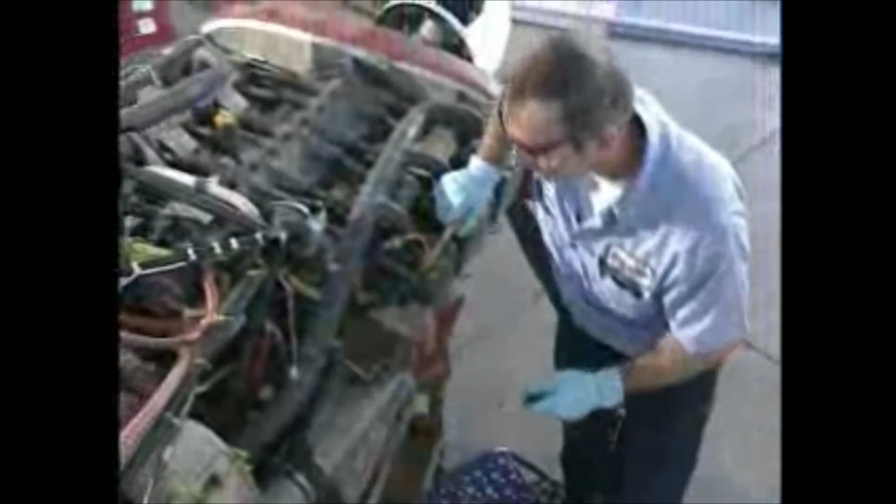Cargo flying is a good example of high-use punishment, and that's why recently we visited Ameriflight in Burbank, California, the maintenance and operations base for over 170 cargo aircraft. This fleet of hard-working Lycoming engines logs thousands of domestic air miles each year. So how does Ameriflight achieve the best performance possible from these engines?

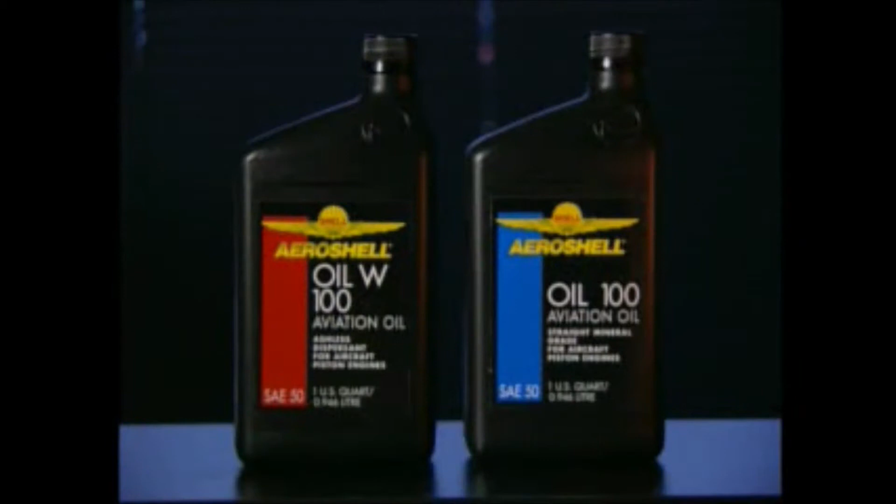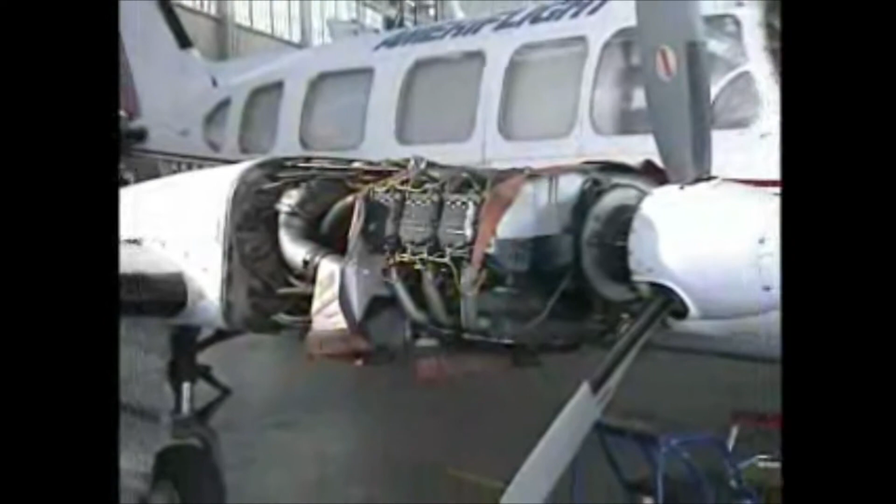And during this video presentation, the professionals will show you how to achieve that optimal performance, or full TBO, from your new or replacement aircraft engine. So let's meet the experts. Ben Visser has been with Shell for over 30 years, working on the research and development of fuel and lubricants. He's the man who can answer the important questions about aviation lubricants.

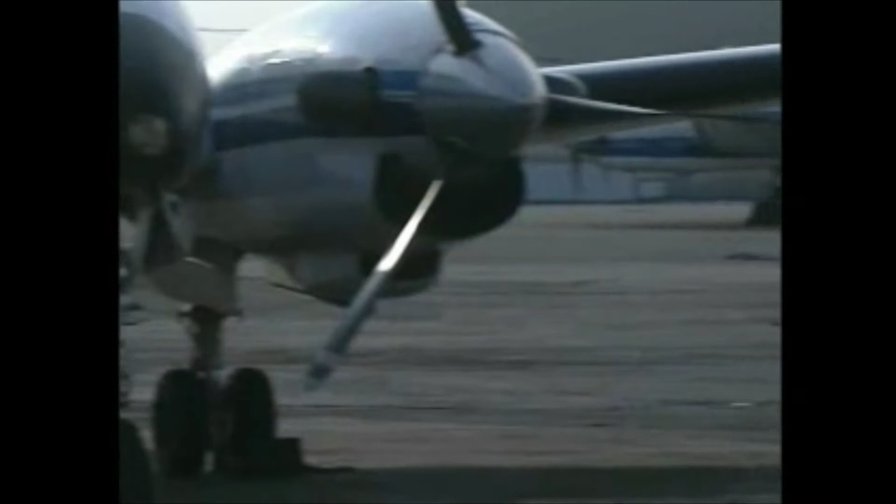Paul McBride, who began his career at Textron Lycoming in 1963, is a third-generation employee. His knowledge of piston-driven aircraft engines is the result of years of hands-on experience. John Hazlett is the Vice President of Maintenance and Director of Operations at Ameriflight Incorporated. John's team has been able to achieve 99.87% reliability of their aircraft by adhering to the methods that will be demonstrated to you during this presentation.

So, what are we hoping to learn from this video? Keep in mind that we'll cover three major areas of aircraft engine care: engine installation, startup and break-in, and maintenance and normal operating procedures. So, as a pilot and new engine owner, you should get familiar with the procedures that will keep that engine flying in peak condition. That is, what to look for during the installation of your new or rebuilt engine, how to handle the initial startup and break-in, as well as executing proper maintenance and normal operating procedures.

Let's focus on the installation. It would be so easy if we could just bolt the engine onto the airframe and place the aircraft back into service. But crucial elements need to be considered when installing a new or reconditioned engine. Instrumentation, baffles and seals, the oil cooler and air filter and their associated hoses are important parts of the overall system. Many high-use aircraft had their engines overhauled 2, 3, or more times, yet still retain the original gauges.

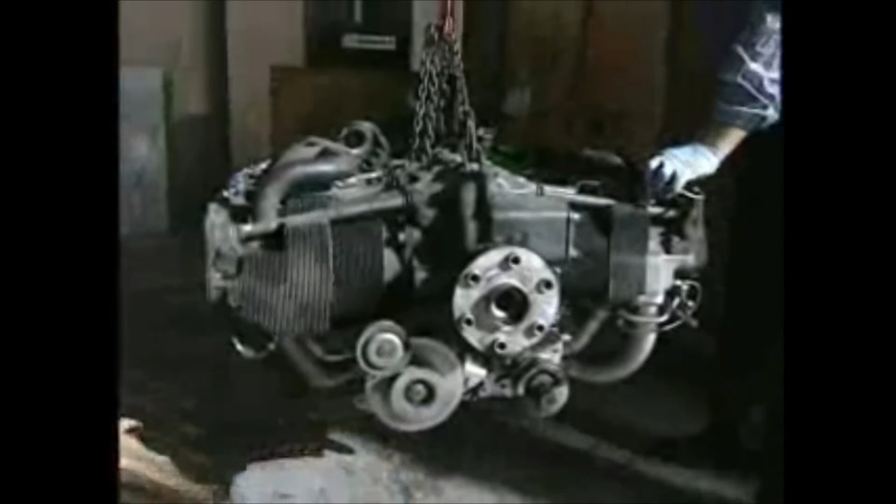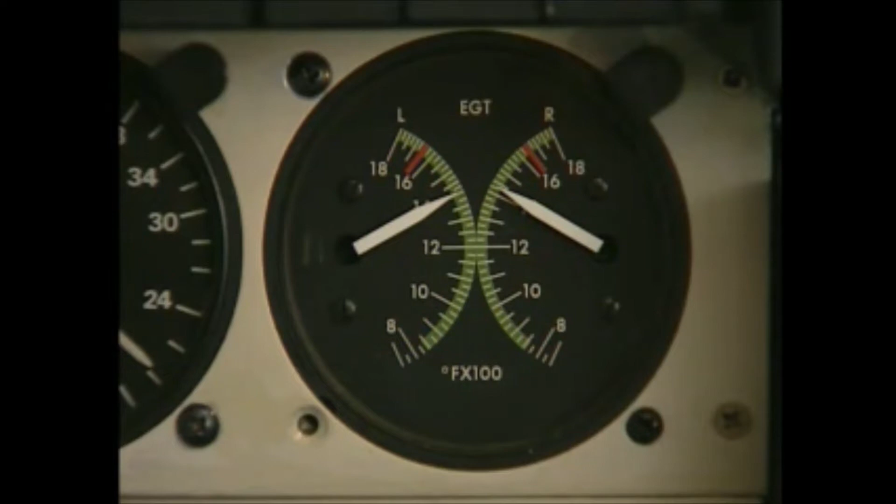For instance, a tachometer with a 5 to 10% error in calibration will greatly increase the load on the propeller and the engine bearings during operation. The cylinder head temperatures and exhaust gas temperatures are indicators of change in the engine. For high-performance engines, these indicators are critical when setting the mixture or monitoring the condition of the engine. So the tachometer, EGT, oil temp, and CHT gauges should be calibrated at this point and not overlooked. Be sure to use the most recent printing of the appropriate service bulletin.

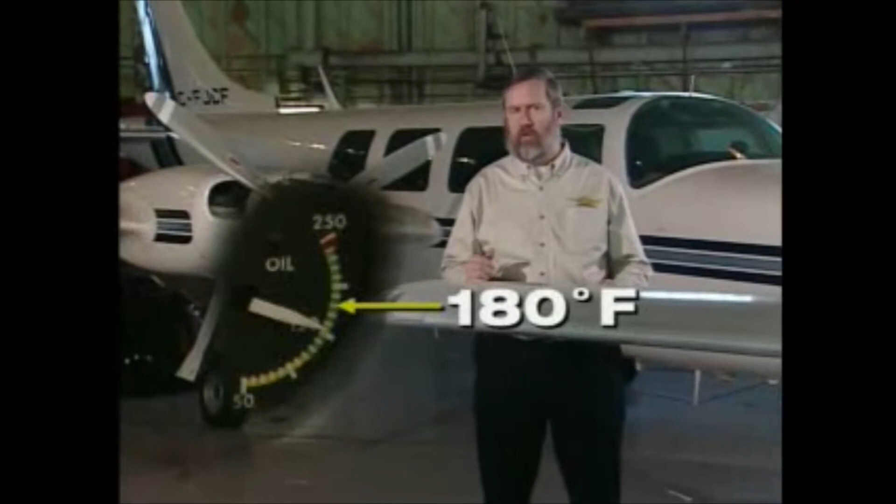But what about oil temperature during operation? Is it too hot? Not hot enough? Ben Visser has the answer. I bet you didn't know that a thermometer and a permanent marker can help you maintain an aircraft engine. But they can, and here's how it works. You need to make a reference mark at 180 degrees Fahrenheit on the face of your oil temperature gauge. This is a good target temperature for your engine oil.

You should be aware that the typical green band on an oil gauge starts as low as 120 degrees and goes all the way up to 245 degrees. That's a pretty wide range. On most Lycoming engines, a cruising oil temperature significantly below 180 degrees won't boil off moisture present in the oil. This is especially true during a short flight.

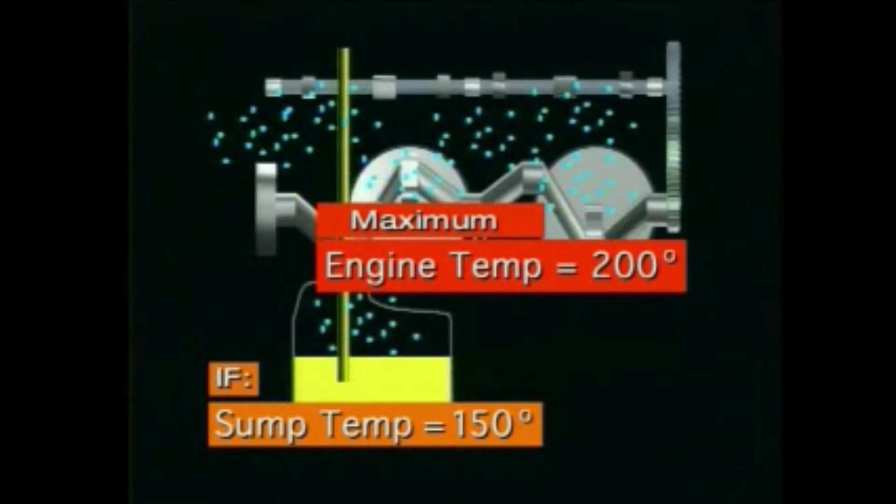At the hottest point in a naturally aspirated engine, the temperature is about 50 degrees higher than the oil in the sump. So, if your oil temperature reading is only 150 degrees, the hottest oil in your engine is just 200 degrees. Well below the 212 degrees needed to boil off the water in the system formed from condensation. The result is water and acid buildup in the crankcase, which could lead to rust and corrosion.

Moreover, if your aircraft is based in a humid climate and only flown occasionally, the chance of corrosion increases. We do not recommend that you ground run an inactive aircraft. A short ground run is insufficient to get the oil temperature to 180 degrees. Now, on a turbocharged engine, the highest oil temperature is usually 70 to 75 degrees higher than the sump.

In this case, we want to keep the oil temperature down to around 180 degrees. This will help reduce engine wear and deposit buildup. That's where the thermometer and marker come in.

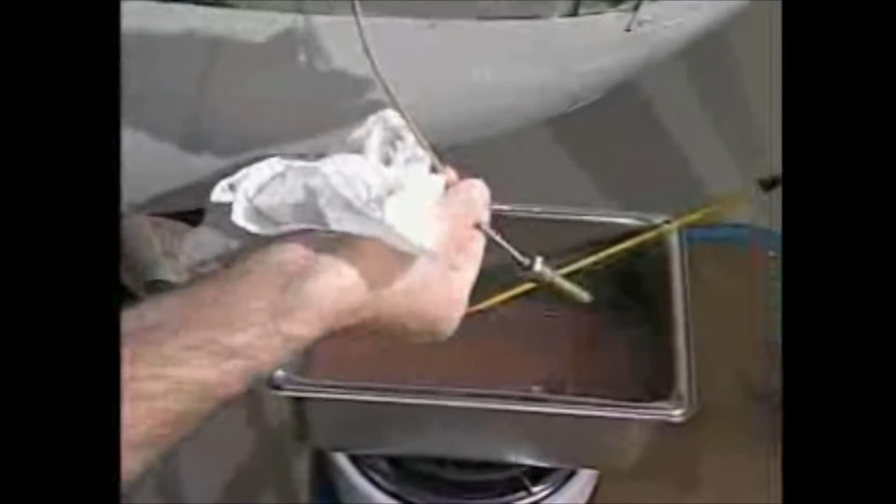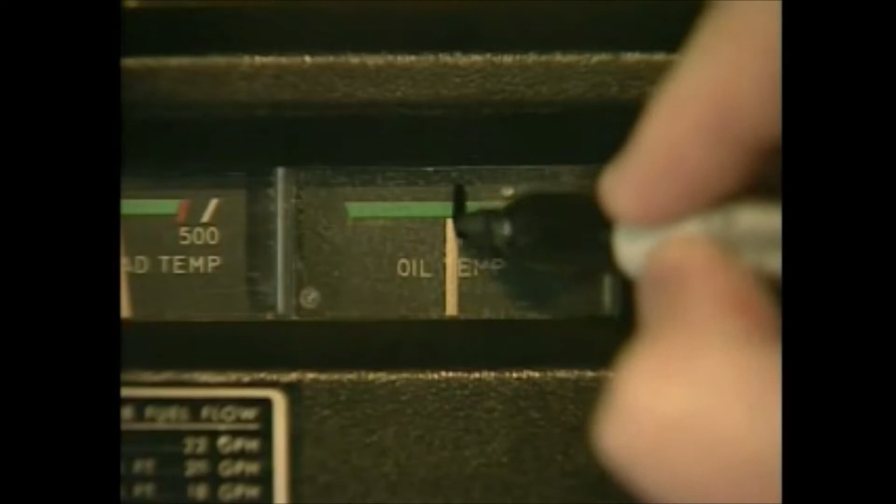Take your oil temperature sending unit and a reference thermometer and place them in a steel container filled with oil. With a hot plate, heat the oil to 180 degrees and mark your gauge. Even if your gauge has temperatures printed on the face, checking the accuracy is worth your time. So, make that mark at 180 degrees and extend the life of your engine.

We'll learn more about checking oil, oil pressure, and oil coolers later. But baffles and seals are the next item on our checklist. Let's see what Ben's cooking up now. Here's a baffling problem that is often overlooked. It involves the baffles and seals of your aircraft. Both are critical to cooling your engine.

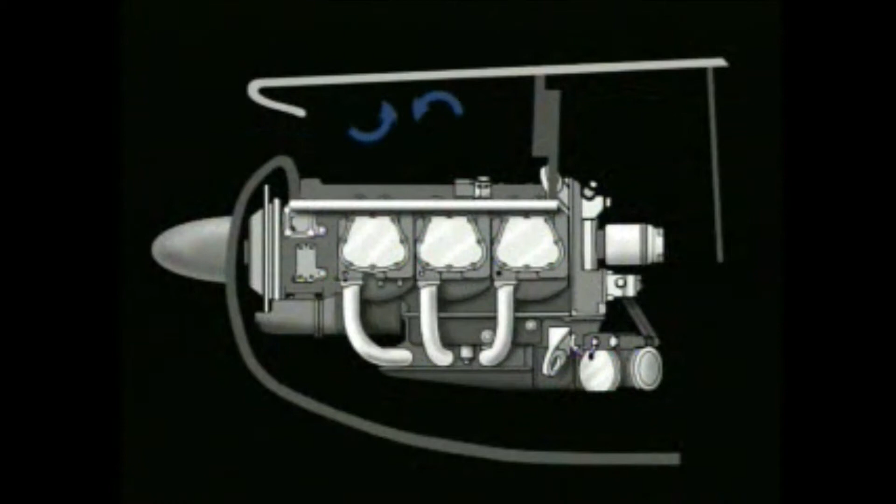When an aircraft is flying, air enters the cowling and creates static pressure above the engine. This pressure forces air down through the cylinders and across the oil cooler to lower pressure areas below and behind the engine. From here, the air is sent out through the flaps or other flaring openings.

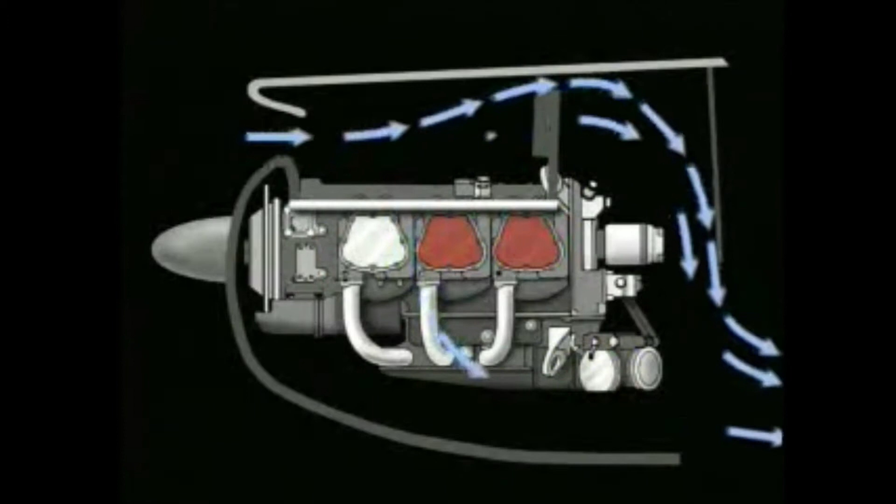If your baffles are broken or misshaped, the deformity can increase the volume of air passing a particular cylinder or other area of your engine. Since the engine is dependent on a fixed amount of air, the result is a decrease of airflow to the other cylinders or to the oil cooler.

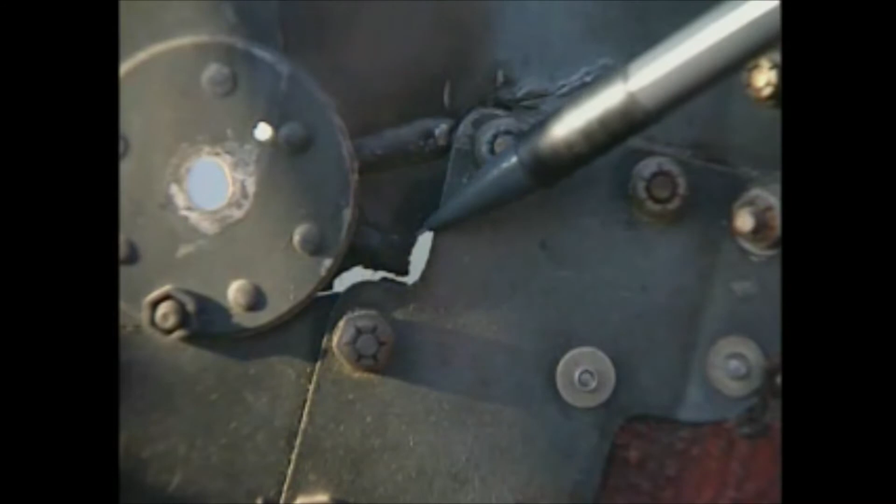Seals can create similar problems. If your seals aren't in good condition or improperly adjusted, they'll allow air to bleed out. This reduces the static pressure, which can increase temperatures. So what can you do? Have baffles checked while the engine is being serviced or before installing a new engine. The seals should be checked during periodic inspection.

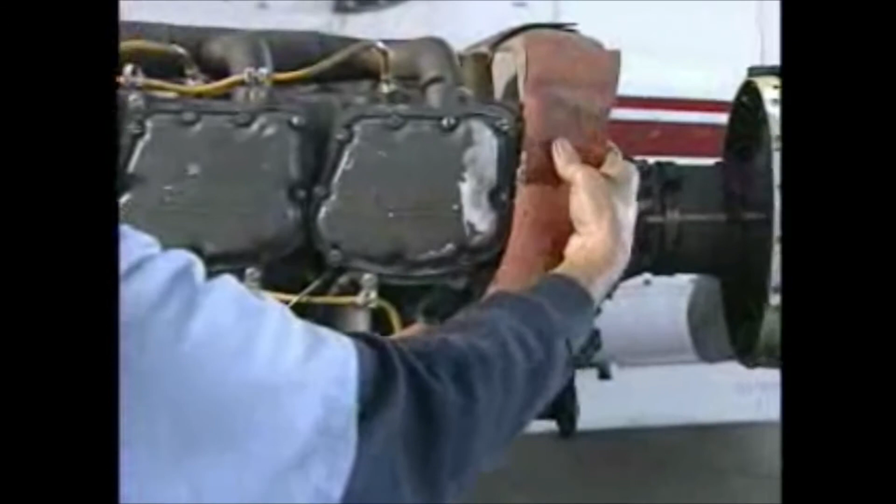If cylinder temperatures still seem abnormally high to you, check all the seals for fit and condition. If the seals aren't soft and pliable, replace them. You can check the fit of your seals underneath the cowling. I like to look at the area where the seal and cowling rub together.

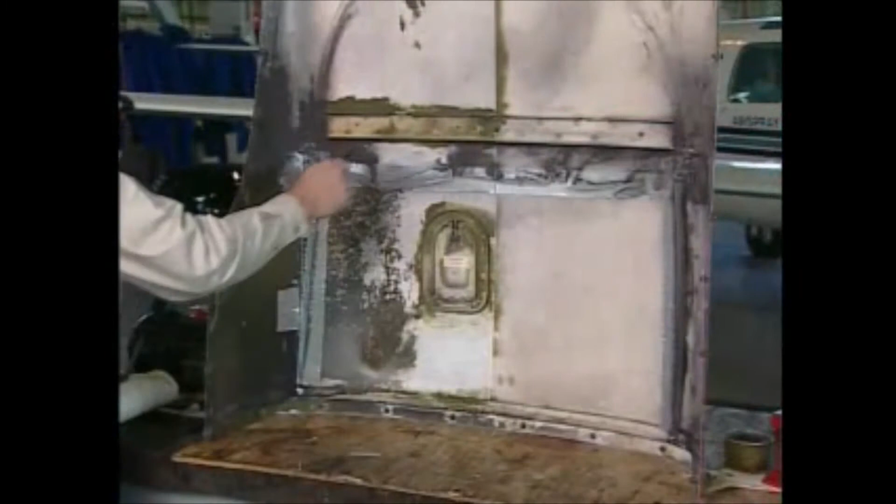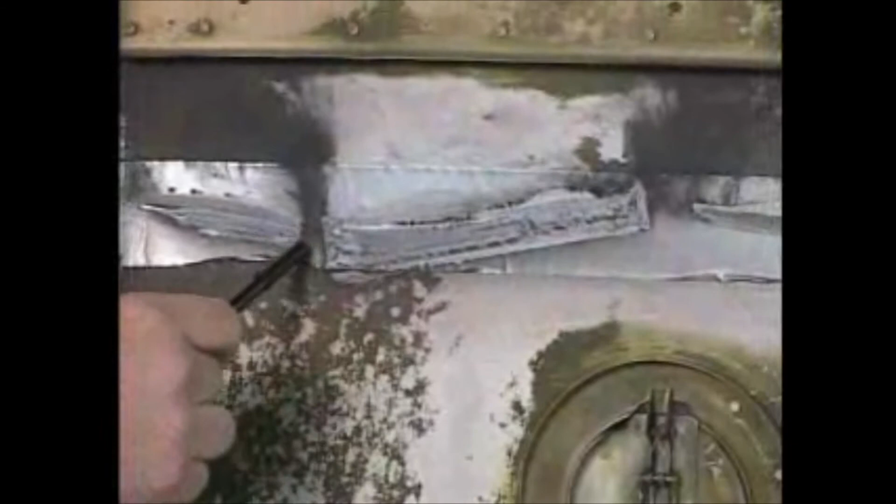You notice here on this side is one continuous line where it's rubbing, but along the top you can see that it is not a continuous area, and you can see where there are leaks. Here it's been rubbing. Here you can see where the air has been leaking out, which would reduce the static pressure above the engine. Inspect the holes at the rear of the cowling for excessive leakage as well.

If your cylinder head temps still run hot, you may need to have the static air pressure above the engine checked during flight. This spec should be available from the airframe manufacturer. So keep your baffles and seals in good shape. It's a simple way to keep your cool.

And speaking of cool, an important focus point on your new engine is the oil cooler, hoses, and lines. If your engine is equipped with a remote oil cooler that hasn't been reconditioned during the overhaul, be sure to flush it out or replace it. This is critical if you had mechanical problems with the previous engine that could have left metal in the system. However, flushing alone may not get all the metal out. These metal particles could damage your new engine.

One complete time between overhaul, or TBO cycle, is the normal life of many oil system hoses, so replace those as well. Remember that the oil cooler system must maintain oil temperatures within the specified limits shown in the applicable Textron Lycoming Operator's Manual. This is also a good time to check the air cleaner and associated hoses. If there are breaks or cracks, this can allow dirt to be sucked up into the engine, which greatly increases the wear rate.

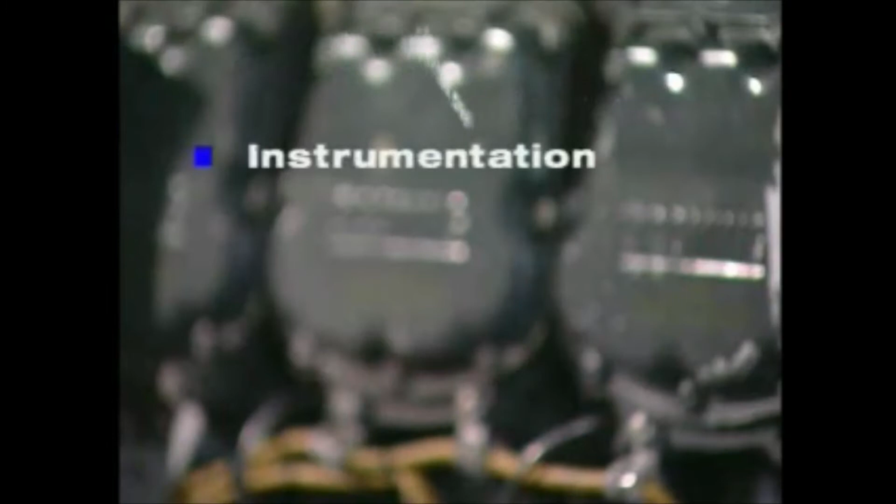So what have we learned? New or reconditioned engines will perform better over a longer period of time with just a little help. Calibrate your instrumentation, check the baffles, and replace the seals if necessary. Flush out the oil cooler and hoses, and look over your air cleaner system. Replace those hoses if you notice excessive wear or cracks.

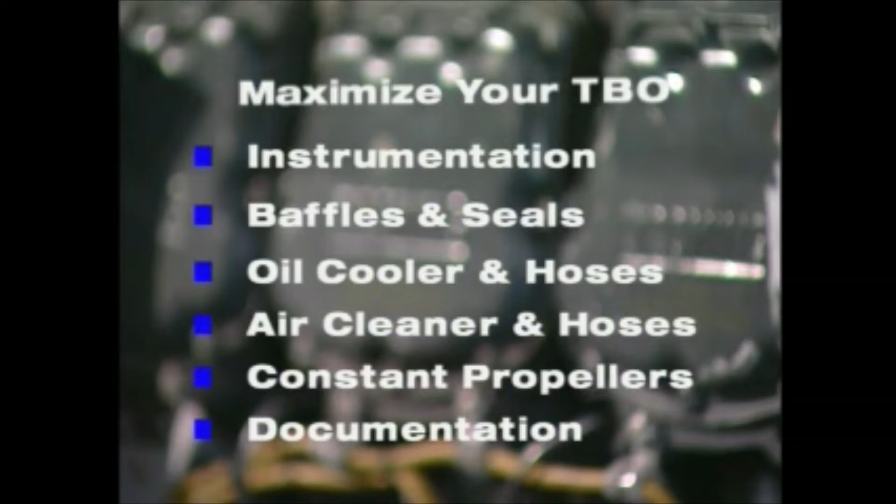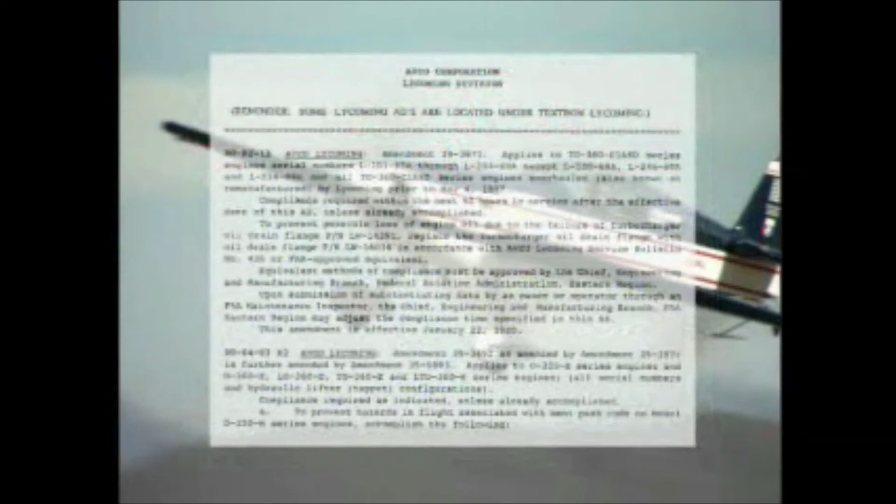And remember to consult the latest revision of the manufacturer's documents. Service instructions give us recommendations from the manufacturer. Service bulletins detail those points the manufacturer has deemed mandatory. Service letters contain useful supplemental information. And airworthiness directives are mandatory compliance regulations from the Federal Aviation Administration. Follow these guidelines at all points during the initial installation process of your new or rebuilt engine.

After your Textron Lycoming engine is mounted, the next step is the initial startup and break-in of the engine. Here's Paul McBride of Textron Lycoming to discuss this important process with you. Prior to shipping your new or rebuilt Lycoming engine, it has successfully passed a factory test run. Once you take delivery of your new engine, follow the initial startup procedure as detailed in the latest revision of the Textron Lycoming Service Instruction 1427.

All Lycoming publications are now available on a CD-ROM. We strongly recommend that you review this publication prior to your initial startup and test flight. Some of the highlights of this publication include instructions that will ensure successful startup of your engine. Number 1, perform a ground run-up test to ensure proper oil pressure and check for oil and fuel leaks.

The purpose of a ground run test performed in the aircraft is to assure that the engine meets all of the specifications, RPMs, manifold pressure, and fuel flow. Limit your test run to 3 minutes so that the temperature on the ground will not overheat and cause damage to the engine. Number 2, follow the recommended stated procedures for your first test flight, including the description of power settings and the duration for each setting.

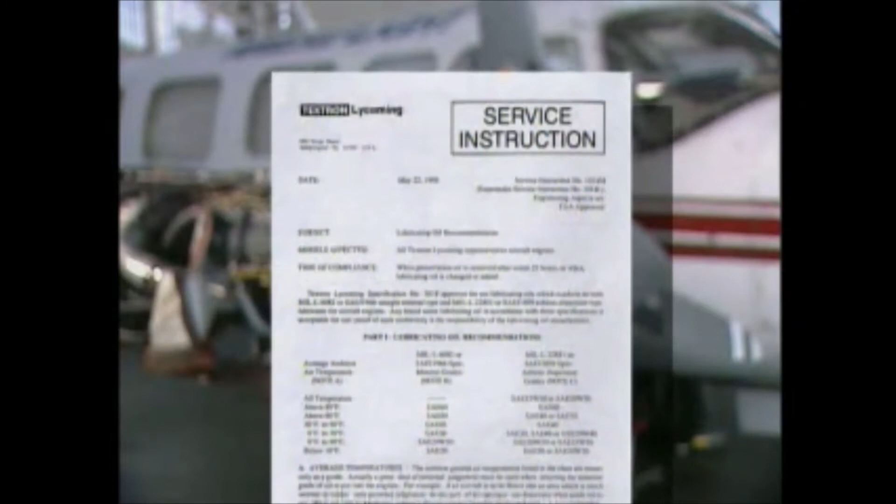The purpose for engine break-in is to seat the piston rings and stabilize oil consumption. There isn't any difference or greater difficulty in seating the piston rings of a top overhaul engine versus a complete engine overhaul. You will note in the instruction that in order to seat the piston rings in a newly overhauled engine, you will want to cruise the aircraft at 65 to 75% power for the first 50 hours. So if you follow these simple steps, your oil consumption will stabilize and the piston rings will be properly seated. John Hazlett of Ameriflight Incorporated is a specialist in this process.

Prior to your test flight, always do a thorough pre-flight as Paul recommended. Pay special attention to cowling security, oil level and dipstick security, spinner security, the things that have been off the airplane for the engine change. Engine test flights should be conducted in daytime VFR conditions.

New or freshly overhauled piston engines tend to run hot, so you should minimize your ground running time. Remember that carelessness at this stage can cause expensive damage. Coordinate with ATC so you can start up, taxi out, run up, and take off without lengthy ground holds. If necessary to hold, turn the aircraft into the wind and idle at 1300 RPM for maximum cooling. At this point, you can make a normal takeoff.

We've moved to the Ameriflight simulator to better illustrate the following steps. Keep in mind that the speeds and power settings that we're using are for a Piper Chieftain. Be sure you use what's appropriate for your airplane.

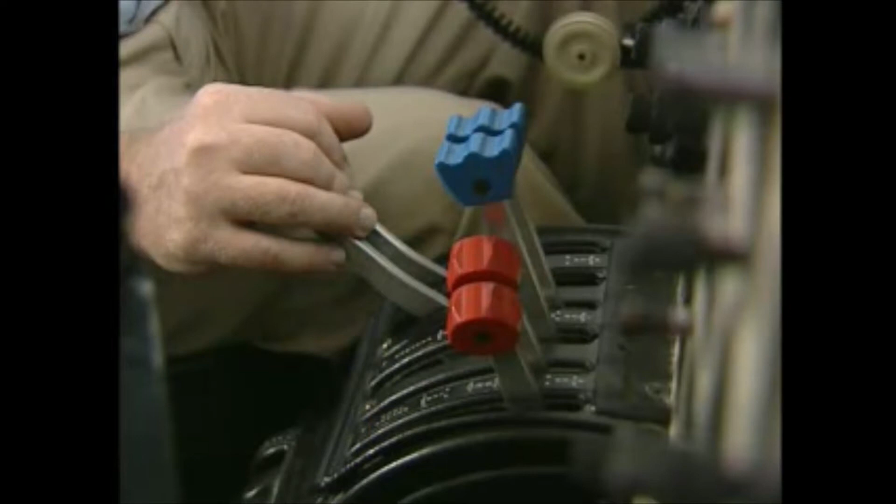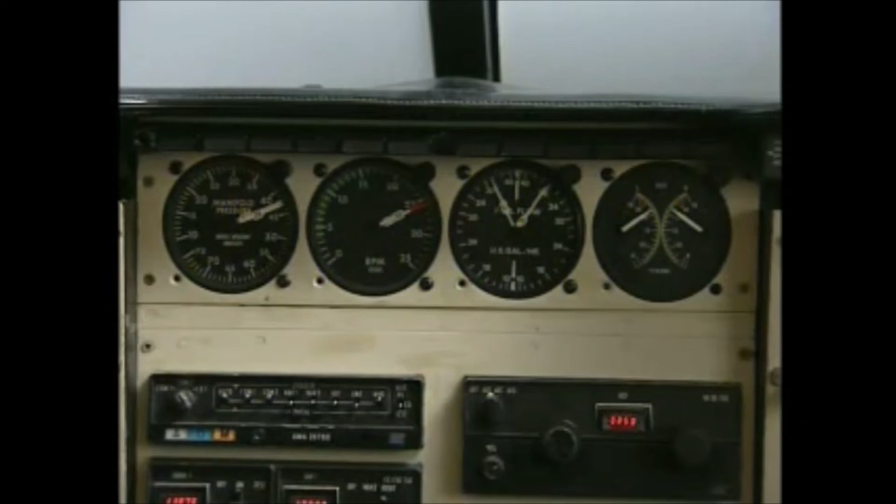During takeoff, if engine RPM is more than 100 above or below the red line on the tachometer, if manifold pressure goes above expected values on turbocharged engines, or if other abnormal conditions are seen, heard, or felt, reject the takeoff and have the problem checked out by maintenance personnel.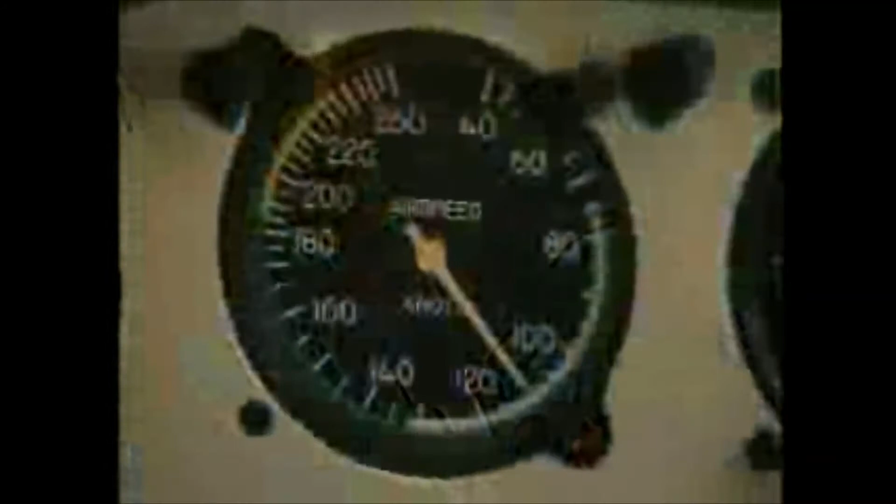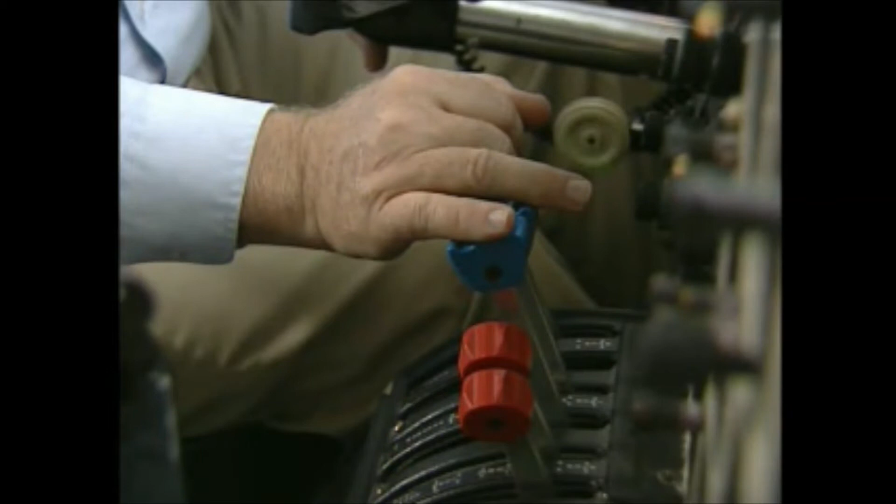As soon as you're above obstacles, accelerate to en route climb speed plus 10 knots for improved engine cooling. Then reduce to climb power at 1,000 feet above ground level, but continue to carry the extra speed. You'll also want to coordinate with air traffic control so that you can circle over the airport until reaching 3,000 feet above ground level. This will allow you to make an immediate return if you run into a problem.

After reaching 3,000 feet above ground level, it's okay to leave the airport area if engine operation is normal. But remember, the objective is to put some time on the engine and verify its operation. Don't stray far from home. If you have a problem and have to land at another airport, it could get expensive. After reaching a suitable cruise altitude, set normal cruise power and mixture for turbocharged engines.

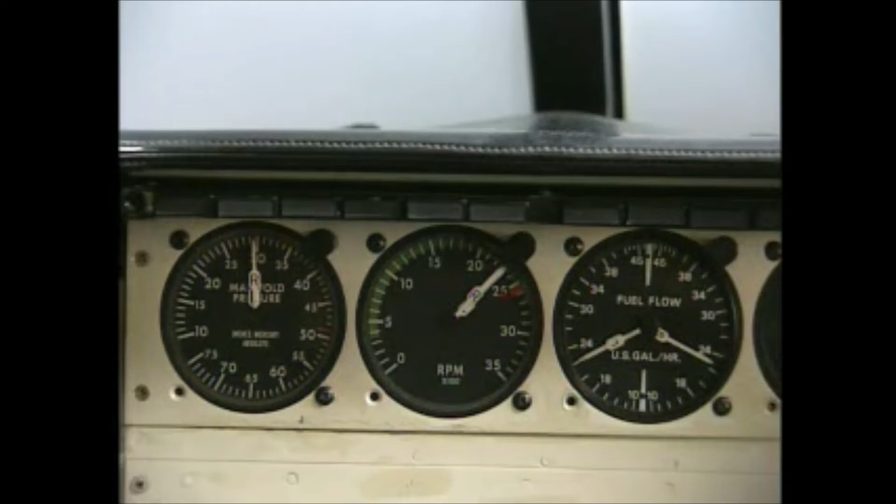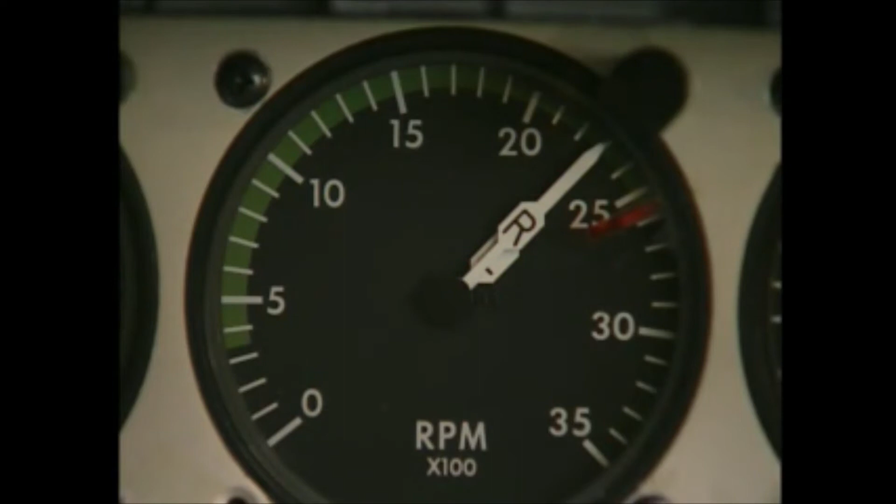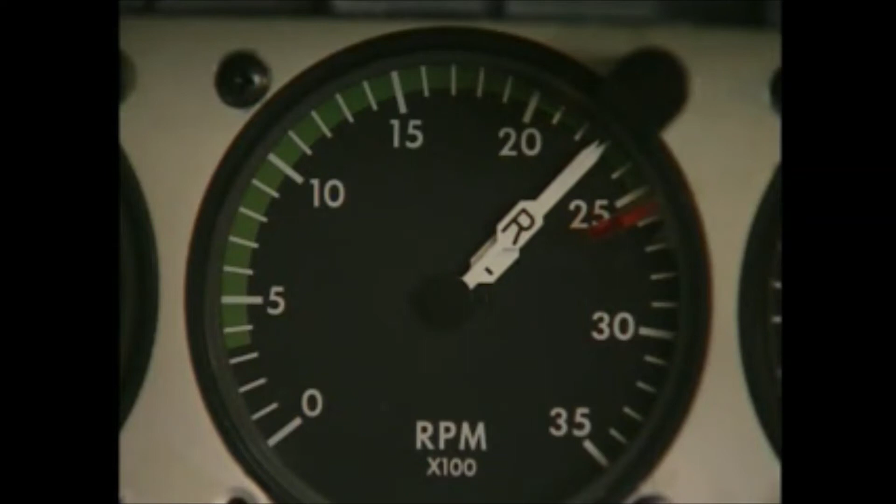For non-turbocharged engines, the procedure is slightly different. In this case, we want to set 24 inches of manifold pressure, 2,300 RPM, and 1 gallon per hour below climb fuel flow. Once every 5 minutes, cycle the new engine prop twice up to red line, back to 2200, and then reset 2300 RPM. After 20 minutes at this power setting, set normal cruise power and mixture.

You should use high cruise power settings for break-in, 65 to 75% of rated power. You don't want to baby the engine at this point or the rings won't seat, but keep an eye on cylinder head and oil temperatures. Let's talk for a moment about the steps you'll want to take prior to landing.

At Ameriflight, we've developed a stage cooling program designed to reduce the engine stress associated with power reductions. Your aircraft is equipped with an air-cooled engine that's pulling a tremendous amount of power. Unlike the liquid-cooled engine in your car, where you can put the accelerator to the floor and then release it with minimal or no damage, your air-cooled engine reacts very differently to sudden power reductions.

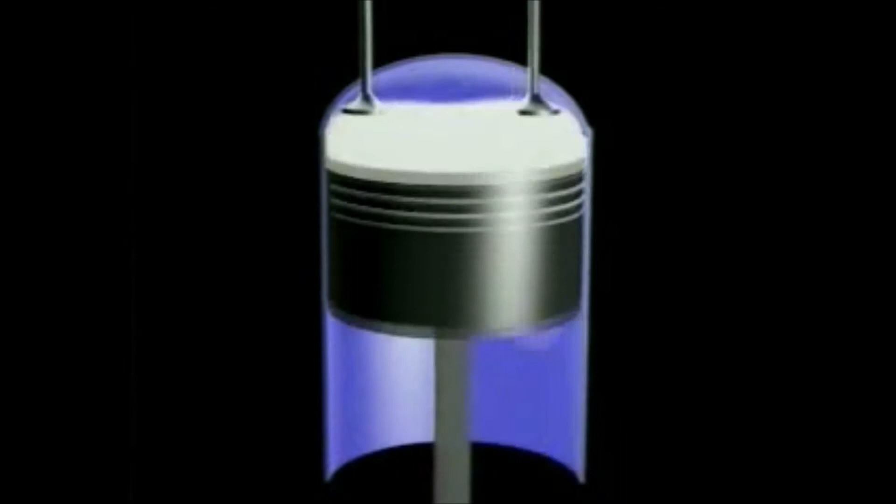Abruptly reducing the power in your aircraft engine causes the various engine parts to cool off and to contract. Since these parts are made out of different kinds of metal, they'll contract at different rates, and this may cause them to crack under the stress. Now, regulating power reductions in a naturally aspirated or unsupercharged engine is important, but it becomes crucial with the turbocharged engine. The concept behind Ameriflight's stage cooling program is to reduce power in small increments in order to give the engine a chance to catch up.

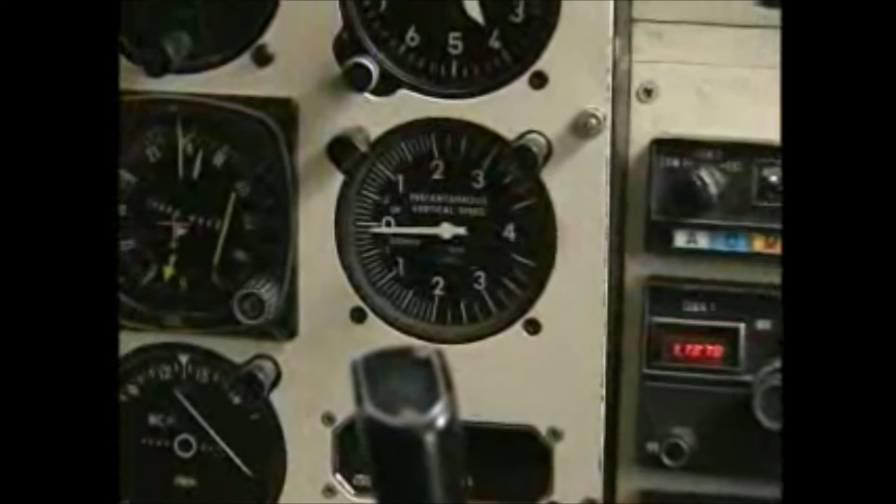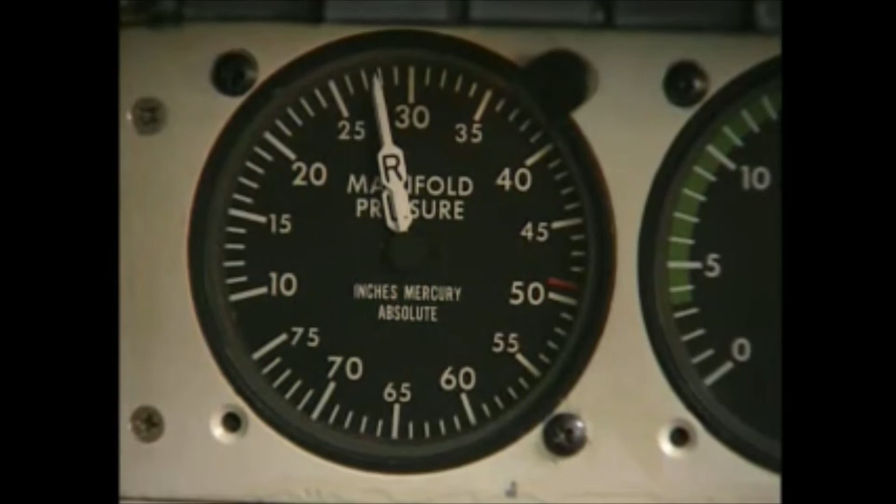Here's how it works. Begin your descent at 500 feet per minute at cruise power. Every 1 to 2 minutes, reduce manifold pressure in small increments, 2 to 4 inches. Keep repeating this process until you've reached the power setting for traffic pattern entry or final approach. Remember, our main concern here is to avoid abrupt, large power reductions, so in addition to a safe landing, you'll have a sound engine at the conclusion of your initial test flight.

Now that you've seen the initial startup and test flight procedures, Paul McBride will explain in more detail the oil recommendations for break-in of your Textron Lycoming engine, as specified in the latest revisions of Service Instruction 1427 and Service Instruction 1014. Although mineral oil was necessary for the break-in process of the old channel or hard chrome cylinder, with the new steel nitrided cylinders on your Textron Lycoming engine, there are several new recommendations.

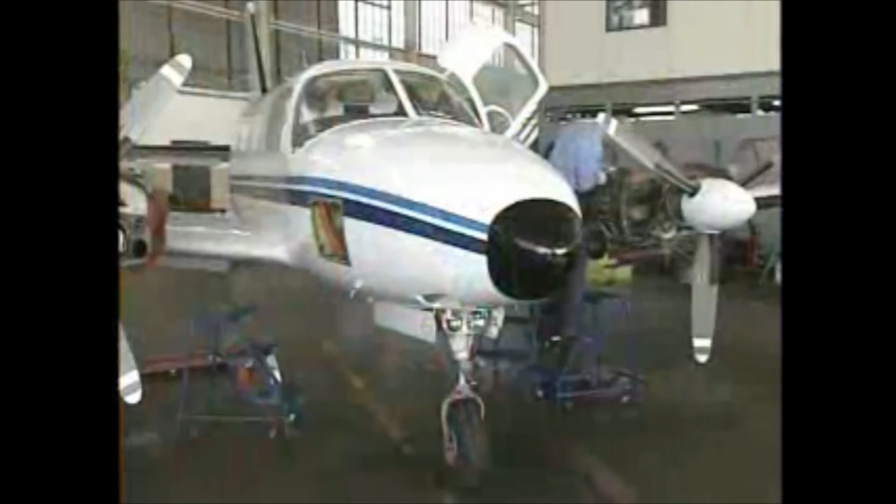For the correct oil for your application, always check the operator's manual and Service Instruction 1014. The latest revision of any document is important reference material because the recommendation may have changed since the original owner's manual was issued. All turbocharged engines must be broken in and operated using ashless dispersant oil only, like Aeroshell W100.

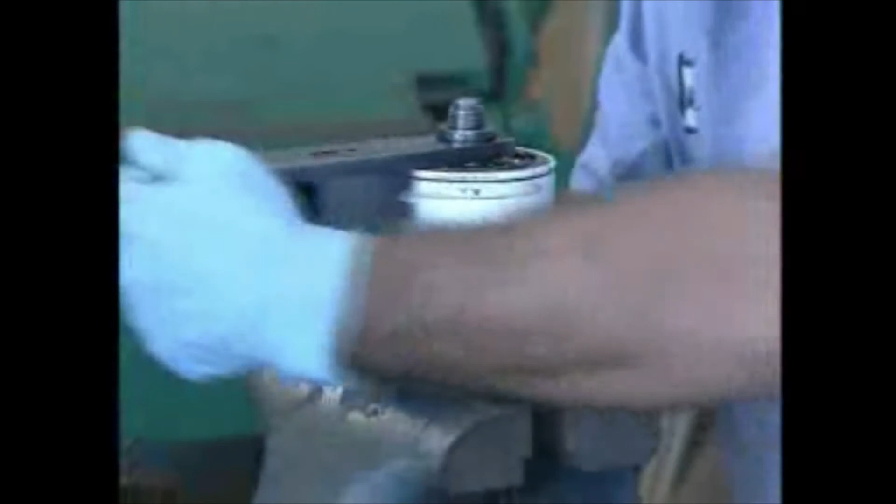Your new engine oil, whether mineral or ashless dispersant, should be changed after the first 5 hours of operation. The next change should occur at 20 hours and again after the next 25 hours. Each time you will clean the screens, cut the filter, and check for metal. We don't recommend performing oil analysis during the break-in process, as we usually see varied amounts of chrome and other metals during break-in. Our criteria tells us if oil consumption has stabilized after these 50 hours and there is no appreciable metal being produced, then your new engine is considered broken in.

Ben Visser has more to add about oil and your newer rebuild engine. What is the proper oil consumption for my engine? This is a question I get asked frequently at air shows. In terms of ranges, there really is no right answer. If I say that 6 to 10 hours per quart is good for a particular engine, a customer may complain that he only gets 5.5 hours per quart and conclude that his engine has a problem. This is not necessarily true, because each engine seeks its own level of oil consumption depending on several factors. Consumption rate depends on the type of oil you use, how the engine is broken in, the type of cylinders it has, and the type of flying the aircraft endures.

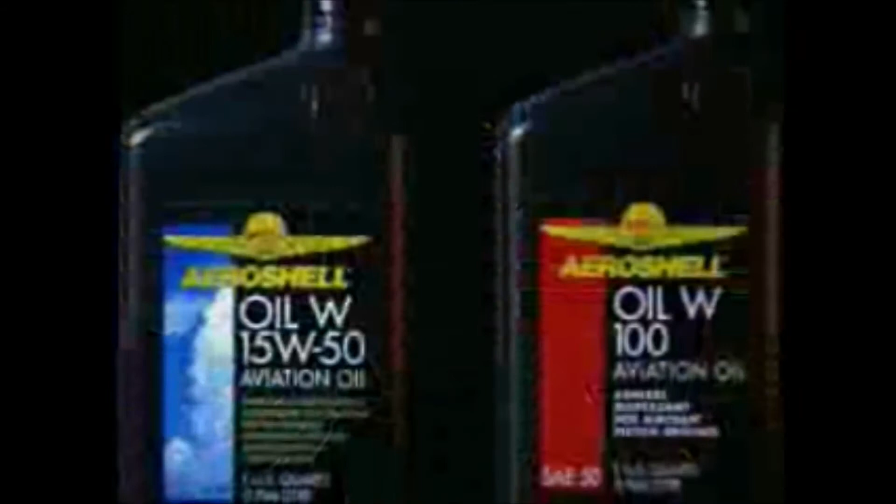For example, if the oil consumption is primarily past the rings, your rate can go down if you switch from a single grade oil like Aeroshell W100 to a multigrade oil such as Aeroshell 15W50. If the oil consumption is going past the intake guides or through leaks, your rate can go up if you switch from a single grade to a multigrade oil. The absolute level of oil consumption is not the critical factor. A significant change in the rate of oil consumption is what you want to look for. If your engine is using a quart of oil every 8 hours and suddenly begins to use a quart every 4 hours under the same type of service and conditions, you may want to consult your maintenance facility.

Low oil consumption is not always better. This is especially true for large turbocharged engines which require a small amount of oil past the rings for proper seating during operation. Also, some aircraft will tend to throw out the first quart if you fill the sump to the maximum level. You may wish to operate a quart low. However, care should be taken when going on long cross countries to ensure adequate oil supply for the length of your trip. Thanks, Ben.

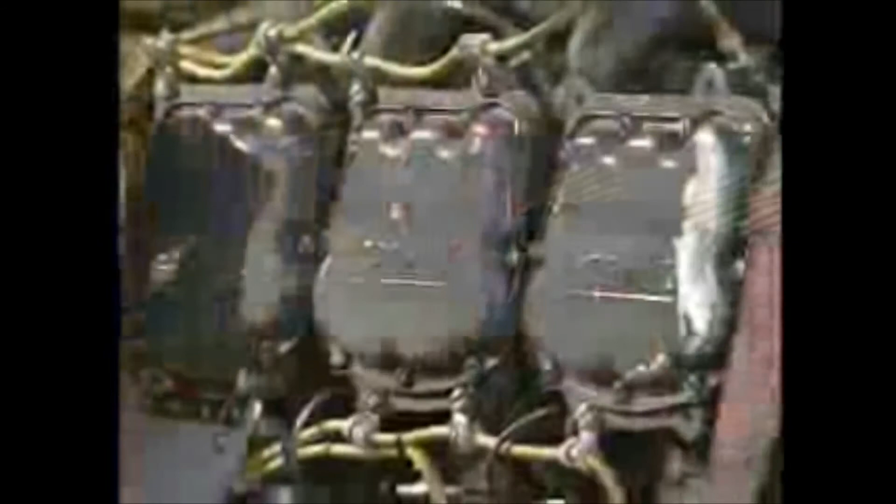So we can conclude that proper engine startup and break-in are critical steps toward maximizing the operating life of your engine. Performing a ground run test and test flight, following the recommended procedures in Service Instruction 1427, and closely observing the recommendations for proper oil consumption will keep your engine in top working condition. Now that your engine has been placed into service, there are some specific normal operating procedures that will keep that engine operating at maximum performance. Operating at the correct temperature, using the correct fuel and oil, and following proper maintenance procedures are the key things to remember. Ben is ready to tell us about the right stuff when it comes to the normal operation of your aircraft.

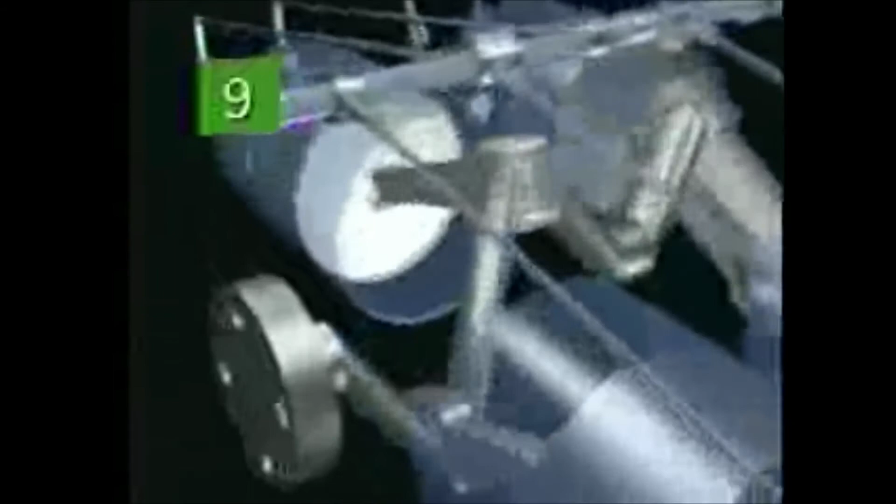Engine oil lubricates and keeps the engine clean. Everybody knows that, but actually engine oil performs 7 major functions. Lubrication to reduce surface-to-surface wear is the primary function of oil. Next, viscosity, or the fluid quality of the oil, acts to separate and protects moving parts.

As a cooling medium, oil is essential in the efficient dissipation of heat within the engine. Oil's cleaning action washes away or suspends the products of combustion and other contaminants that reduce engine life. Corrosion protection is achieved through additives and helps protect your engine from moisture and the byproducts of combustion. And hydraulic action is the property of oil to transmit energy through a fluid.

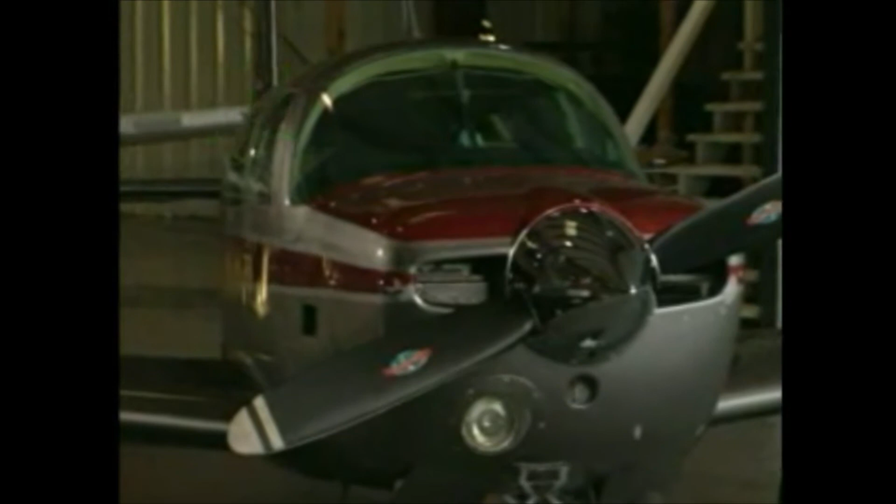Now that you have a better understanding of what oil really does inside your engine, let's look at how useful air-oil separators can be to the process. Air-oil separators can be helpful when used correctly, but if not properly installed, they can act as a condensing unit, returning all the moisture from the crankcase blow-by back to the crankcase. This process can increase rust and corrosion during periods of inactivity.

Whether your airplane has an air-oil separator or not, we recommend that if the plane is dormant for more than 4 months, use a preservative oil like Aeroshell Fluid 2F to reduce rust and corrosion.

Crankcase oil heaters heat the oil prior to engine startup. If there is moisture present in the oil and the heater is left on all the time, increased vaporization of moisture from the oil will be the result. The water will condense on colder, non-heated engine parts, increasing the rust and corrosion tendency on these parts.

If you have one of these units, we recommend you plug it in a few hours prior to flight time, or even the night before. Don't leave it on all the time. Also, use a preheater system that heats the engine as well as the oil.

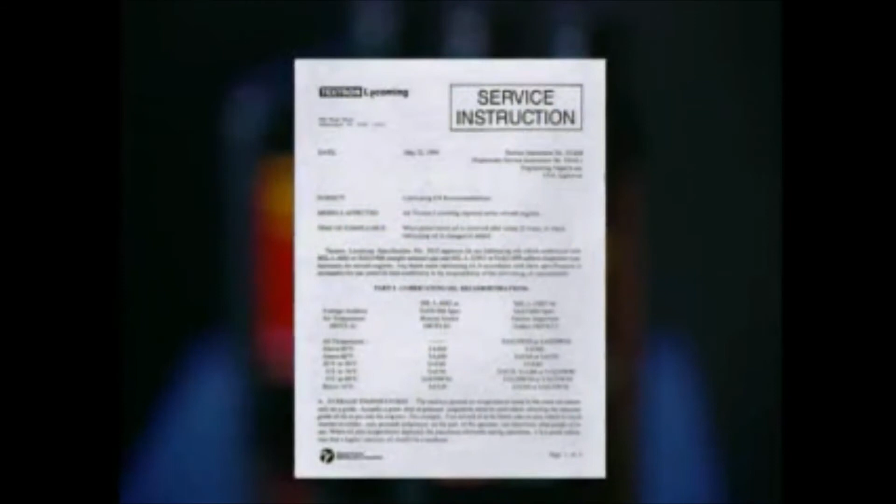For Textron Lycoming engines, we recommend using lubricating oils which conform to SAE J1966 and the former MIL-L-6082 straight mineral oil spec, or SAE J1899 and the former MIL-L-22851 ashless dispersant oil spec. The latest revision of Service Instruction 1014 states any brand name lubricating oil in accordance with these specifications is acceptable for use, and the proof of such conformity is the responsibility of the lubricating oil manufacturer.

The ambient ground temperatures listed in this chart are meant only as a guide. Your personal judgment should be used when selecting the seasonal grade of oil to put into your engine. For example, if your aircraft is flown from or into a dramatically warmer or colder climate, only your personal judgment can determine what grade of oil to use, or when oil temperatures approach the maximum allowable during operation, it's always a good idea to consider using a higher viscosity oil.

Remember, most normally aspirated engines must be broken in on mineral oil during the first 50 hours of operation or until oil consumption has stabilized. All turbocharged engines must be broken in and operated with ashless dispersant oil only. See the manufacturer's publications for exceptions. For example, the O-320-H and O-360-E series.

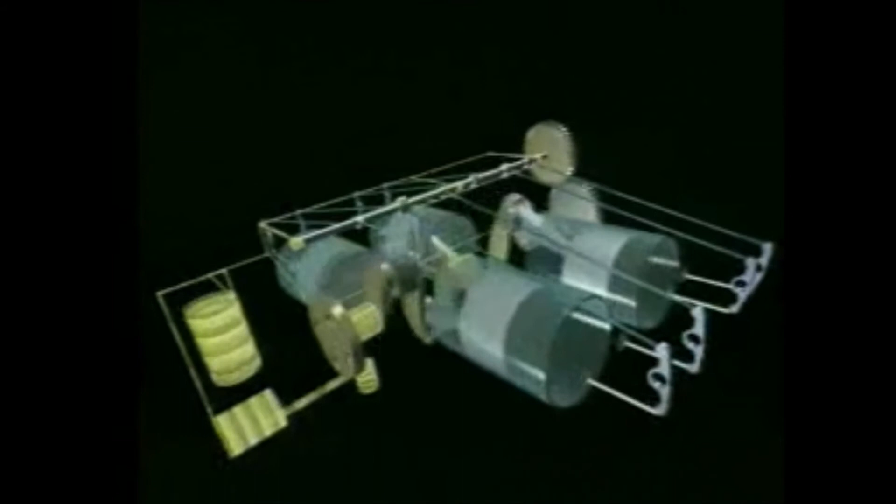Laboratory tests indicate that in the first moment when an engine is started, there is insufficient residual oil between the rubbing parts, which can affect the service life of these components. Textron Lycoming has evaluated an agent which, when added to the normal oil supply, deters scuffing under these conditions. The additive is LW-16702 and is recommended as being essential for good engine operation.

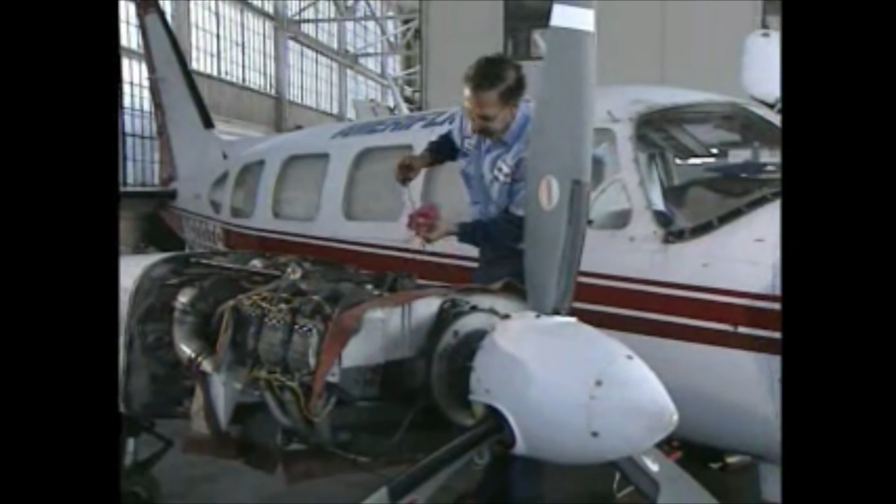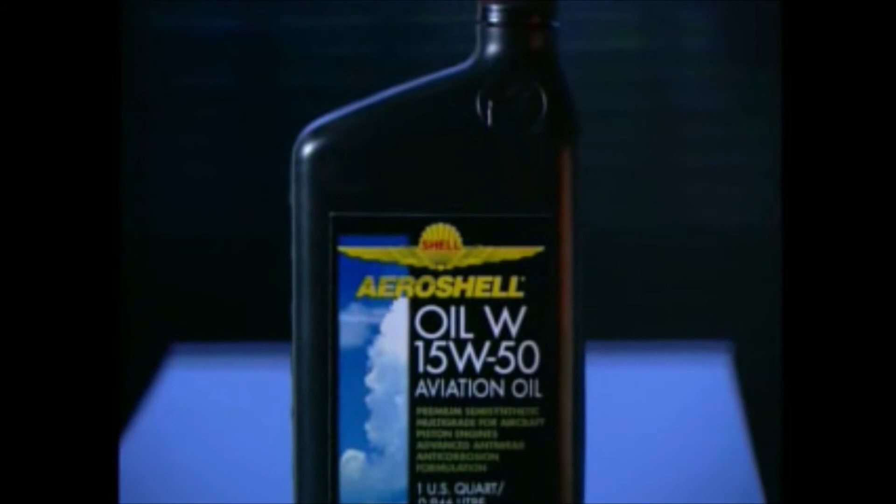It can also be used in all types of aircraft engines except for installations that utilize a friction-type clutch with a common transmission engine oil system. See the latest revision of Service Instruction 1409 for additional information. This additive is also contained in Aeroshell Oil W15W50 and Aeroshell Oil W100 Plus, which meet the provisions of this service instruction. Review the special stipulations concerning the use of LW-16702 for your particular engine series.

LW16702 or an oil containing this additive is required for some engine models and recommended for others. You can find this information in the latest revisions of Service Bulletins 446 or 471. Service Bulletin 480 details Textron-Lycoming's recommendations for oil change intervals.

We recommend a total of 4 months maximum between changes for both full flow filtration and pressure screen systems, or 25-hour interval oil change and screen cleaning for all engines employing a pressure screen system, or a 50-hour interval oil change and filter replacement for all engines using full flow filtration system unless otherwise noted as an exception in the latest revision of Service Bulletin 480. If all of these numbers seem confusing, all the more reason to pay close attention to your service bulletins.

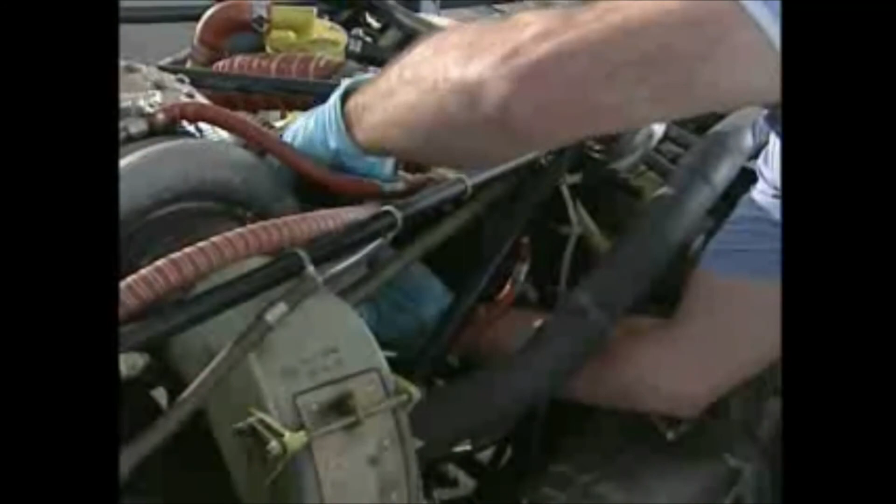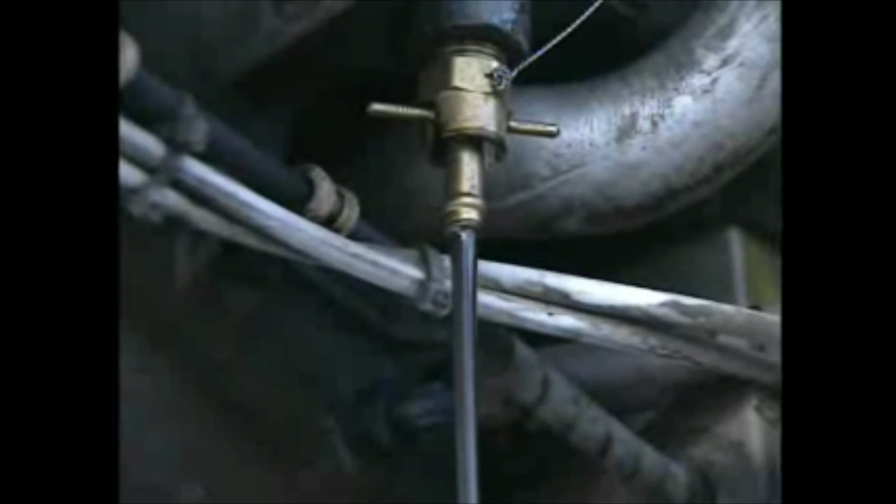Now let's take a look at the importance of an oil change and the role of oil analysis in an ongoing maintenance program. An oil change is still one of the cheapest, best maintenance buys going. Always change and inspect your filter and inspect your suction and pressure screen at each oil change. Another thing to remember about oil change intervals is not to go by the color of the oil in the dipstick. If the oil looks very black, that doesn't necessarily mean it's worn out. Conversely, if it's golden like honey, it doesn't mean you can go another 50 hours.

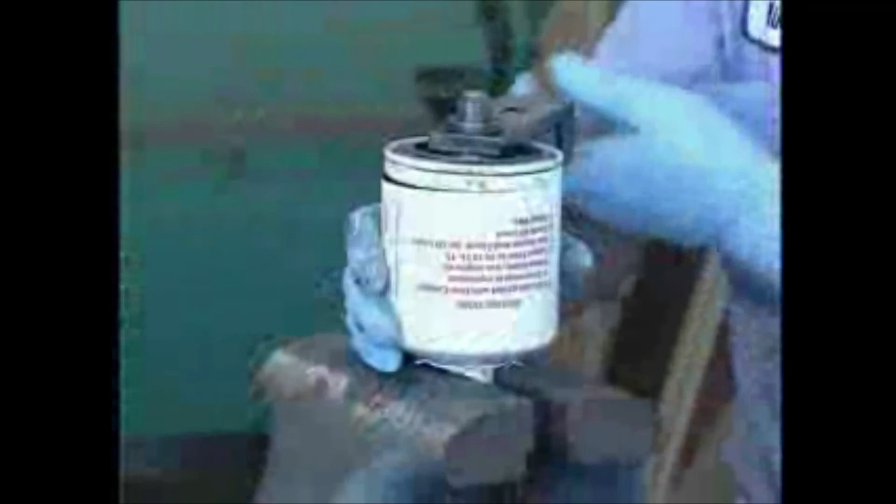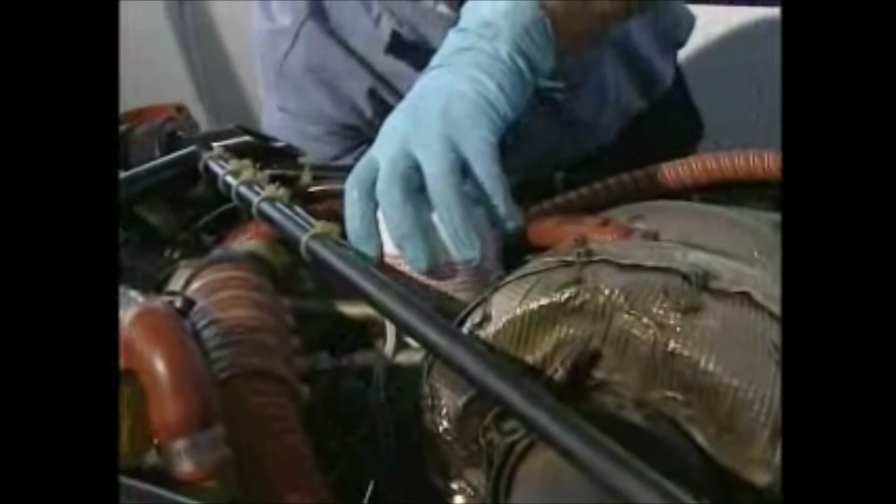Cut your filter apart and use a magnet to locate iron filings in your filter. An excess of iron or other metals could mean impending failure of internal parts. Also, conduct a visual inspection for non-metallic materials. Be sure to check that your safety wire has been reinstalled after a filter change. And please, avoid excessive skin contact with used oil. Remember, used oil contains hazardous substances such as lead, a byproduct of combustion.

Don't worry if you have to mix brands or types of oil in an emergency. All mil-spec oils are compatible. Always change your oil before storing for the winter. Better yet, follow the engine manufacturer's recommendations for preservation. If you do oil analysis, do it on a regular basis. Take samples in a consistent manner. Do use the correct oil for your type of flying. When in doubt, refer to the engine manufacturer's recommendations.

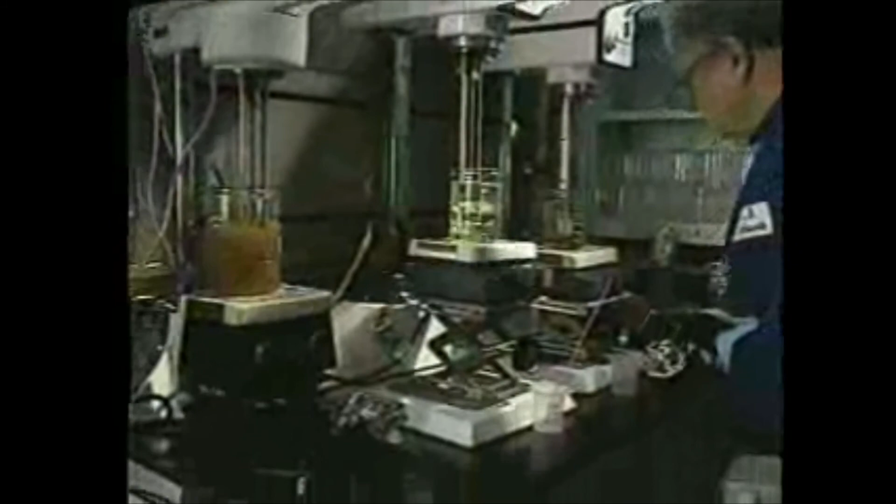While oil analysis may not tell you everything about your engine condition, it's still a good tool to detect changes within your engine and should be considered as an important part of an ongoing preventative maintenance program. And finally, consider oil analysis as part of the research in buying a used aircraft. But remember, just one analysis may not tell you everything about the engine.

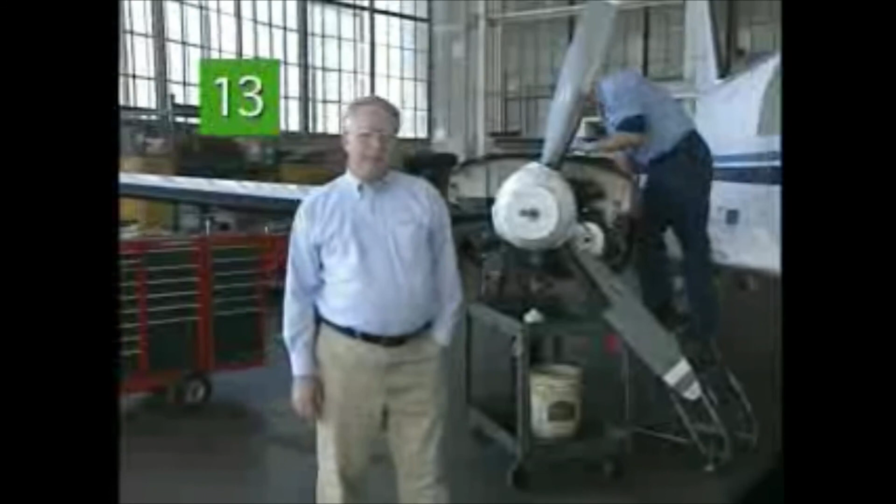Our final segment is designed to give you some tips to help you respond to a variety of other situations you may encounter during the normal operation of your new or rebuilt engine. John Hazlett is here to review some of these situations. Situations like leaning, which, done properly, is beneficial for all engines and helps ensure that the oil gets up to the proper temperature. On the other hand, aggressive leaning, especially in turbocharged engines, can cause excessive temperatures and shorten the life of your engine.

A word about temperature management. Common sense tells us to bring the engine up to the proper temperature before takeoff, and after landing, allow it to cool prior to shutdown. Your engine components are metallic, mainly aluminum and steel, and these metals expand and contract at different rates. Aluminum crankcases and pistons have a higher coefficient of thermal expansion than steel cylinders and crankshafts. Consequently, events like shock cooling your engine during a rapid descent can dramatically shorten the life of your engine parts.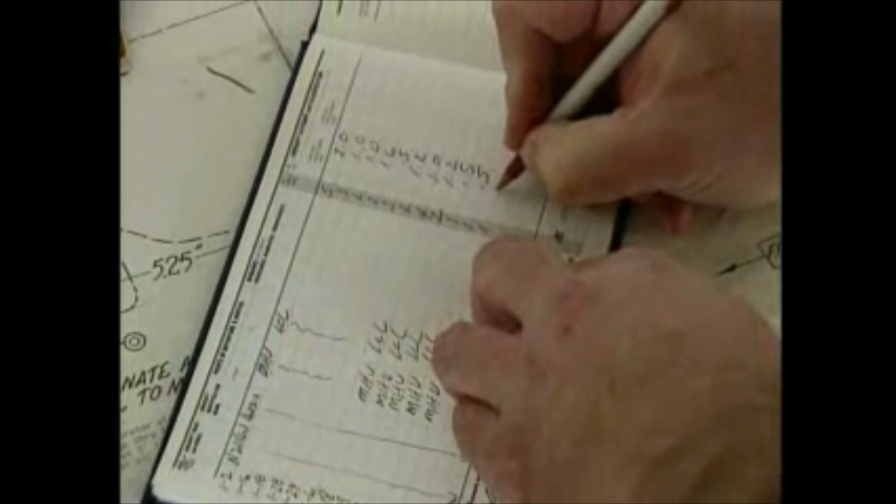A word about inspections. Perform your 100-hour and annual inspections on time. Check that the seals and baffles are properly maintained. A word about trend monitoring. Some record keeping is mandated by law. As an aircraft owner or operator, some additional records will allow you to make important comparisons between flights, and these comparisons yield valuable information about changes in engine performance. So monitor the gauges after they're stabilized and record the readings. Compare those entries from flight to flight. Significant changes in these instrument readings are clues that engine problems may be developing.

And a final word about oil. Change your oil on a regular basis. Remember that the less you fly, the more critical oil changes become. Check oil filters and screens for evidence of metal or other contamination, and don't rely on the oil's color to let you know when your oil is due for a change.

Use winterization kits to prevent congealing in the oil cooler and to get the oil up to the proper temperature in cold weather. If you use an air oil separator, an acrobatic inverted system, or any additional external oil lines and plumbing, make sure the system is properly installed and does not act like a condensation unit that will return moisture to the crankcase. Remember, if you take good care of your engine, it will take good care of you.